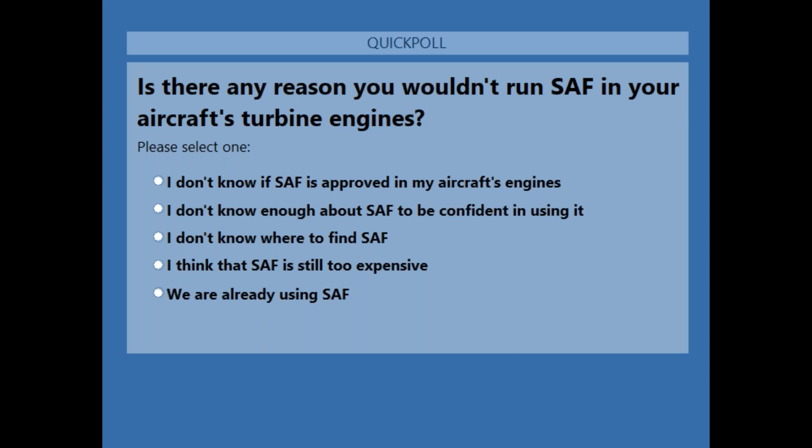The two top results were: I don't know if SAF is approved in my aircraft's engines, and I don't know where to find SAF. Those two will be answered today, hopefully in this seminar.

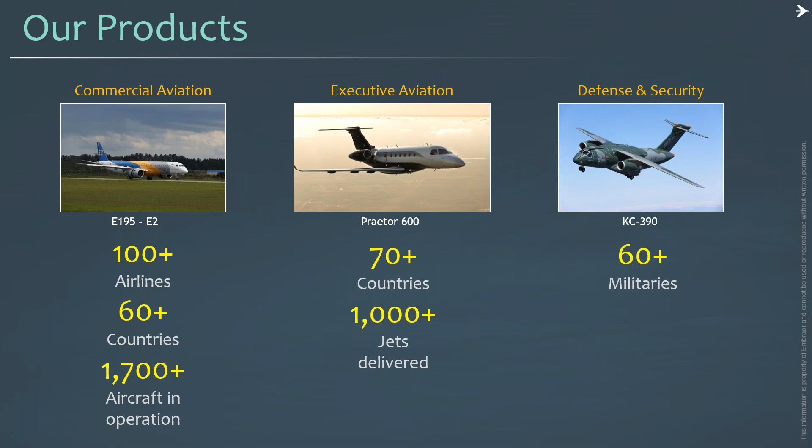Well, aviation climate actions. Let's set the scene for sustainable aviation fuels, or SAFs. The aviation industry has an ambitious target for emission reduction: reducing 50% of net CO2 emissions by 2050, compared with 2005 levels. The industry has made significant progress, avoiding over 10 billion tons of CO2 since 1990.

Let me talk about some examples. In operations, air traffic management modernization is very important for shortening routes, improving the efficiency of the system, and reducing delays. We are reducing fuel consumption and reducing CO2 emissions.

In terms of infrastructure, airports are using alternative energy for ground equipment, such as biofuels or electric cars.

Global market-based measures: the main example here is the ICAO CORSIA. ICAO is the International Civil Aviation Organization, and CORSIA is a reduction scheme for CO2. Airlines will start offsetting the growth of CO2 in international flights between voluntary states.

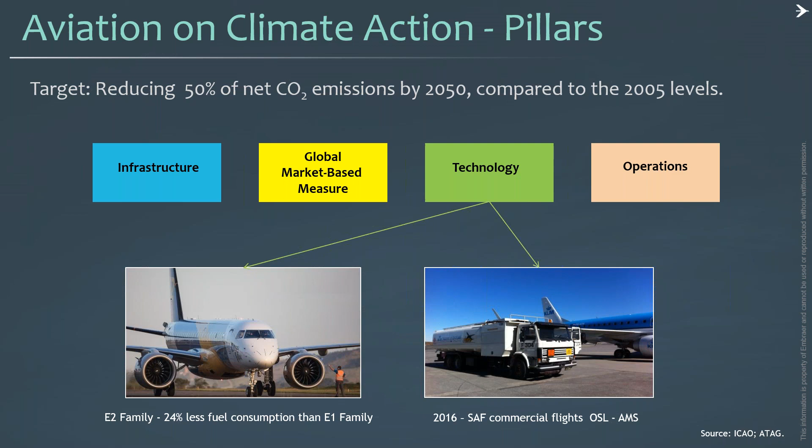But first of all, let's understand conventional fuel. Next slide, please. Conventional fuel versus sustainable aviation fuels—we need to understand this difference.

Conventional jet fuel, or aviation turbine fuel as it's technically called in some standards, is fuel derived from conventional sources. According to ASTM International, these conventional sources are crude oil, the largest source used, natural gas, liquid condensates, heavy oil, shale oil—mainly in the United States—and oil sands.

Alternative aviation fuel is a synthetic fuel, produced from non-conventional sources. I usually classify these non-conventional sources into renewable and non-renewable sources. The most famous non-renewable sources are coal, the oldest used, and natural gas.

Among renewable sources, there are many, but here I'm listing some: vegetable oils, used cooking oils, wood residues—sometimes called lignocellulosic materials—municipal solid waste, industrial waste gases, and more recently, microalgae oils. It's important to say that alternative fuels certified for both quality and sustainability will be designated as sustainable aviation fuel.

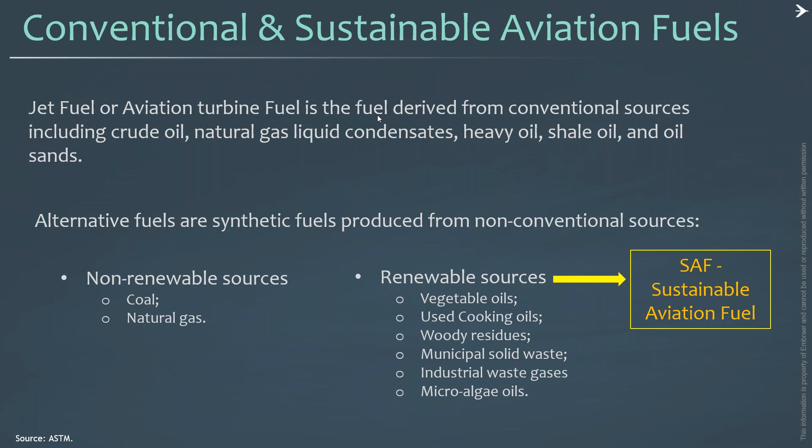But before sustainability, let's understand an important concept in aviation: drop-in fuel. Next slide, please.

Ensuring safety and performance—safety is the first concern in aviation, performance is the second. Sustainable aviation fuels must be drop-in.

A technology candidate seeking approval as an alternative aviation fuel must be drop-in, and needs to deliver the same level of safety and performance compared to conventional jet fuel, which is the fossil jet fuel that has been used for decades in aviation turbines.

And why do we need this drop-in fuel? Because there are something like 24,000 aircraft in operation around the globe. There is no chance for ongoing modifications to engines, aircraft fuel systems, or even fuel supply infrastructure. There's no space for change.

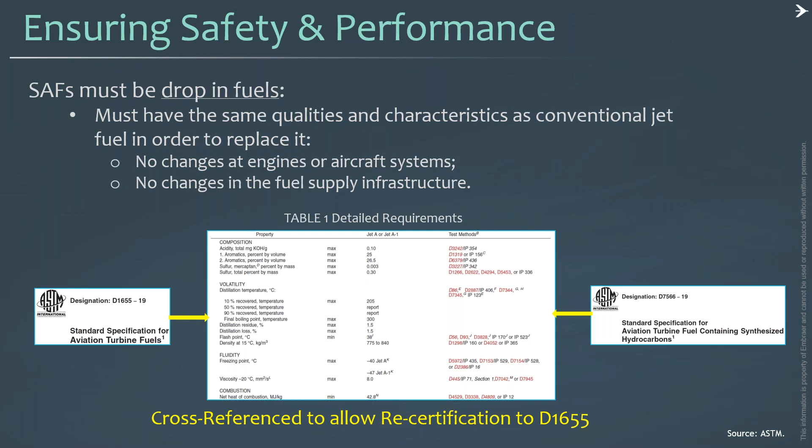But how can we approve a new technology as an alternative fuel? In the next slide, we can see the process.

This leads to Tier 2. Tier 2 is a step with many tests to be done. For example, you need to provide information related to property behavior, such as density versus temperature and viscosity versus temperature. Another important step at Tier 2 is material compatibility - tests for metallic and non-metallic parts need to be performed. It's a very important step at this tier.

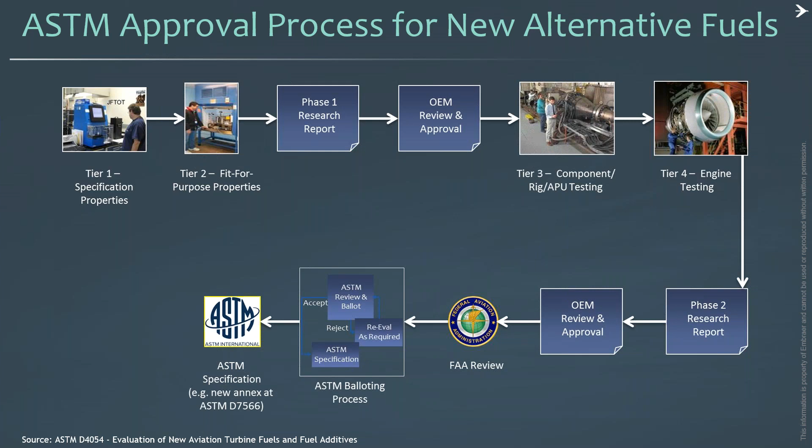Mainly due to the level of aromatics - aromatics is a chemical component that's very important. There is a minimum level of aromatics required in sustainable aviation fuel composition, and this minimum is necessary for different systems, meaning for the fuel system and to allow the performance of some elastomers.

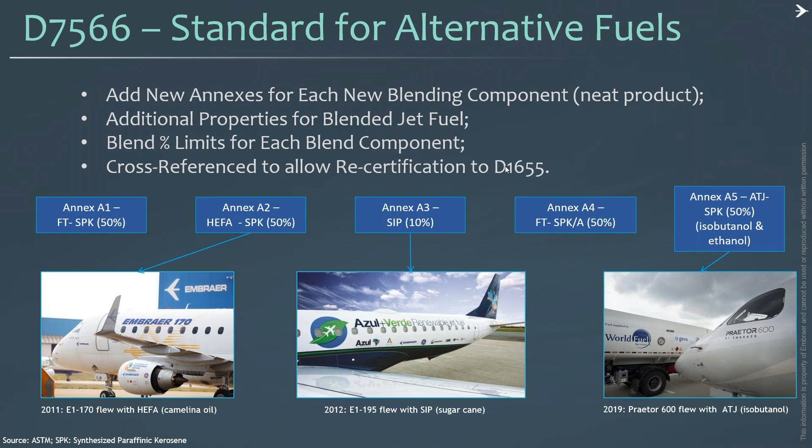You can think, oh, it's just these flights every day around the world, it's a small number. Okay, it's a small number, but have in mind that SAF is a new chain. It's under development. Mainly compared with other biofuel industries, you have a small number of plants producing SAF around the globe. But in our opinion, there is no chance for return.

SAF is very important because aviation is liquid dependent. Electrification, mainly for commercial aircraft, is still far off. The aviation industry is aware of its responsibility with the environment and truly committed to reducing global emissions. For this reason, we rely on sustainable alternative fuels as part of the solution. There is no way to return. We need to have sustainable alternative fuels for this huge amount of aircraft that will be flying for many, many years. Thank you very much, and I'm very proud to be part of this webinar.

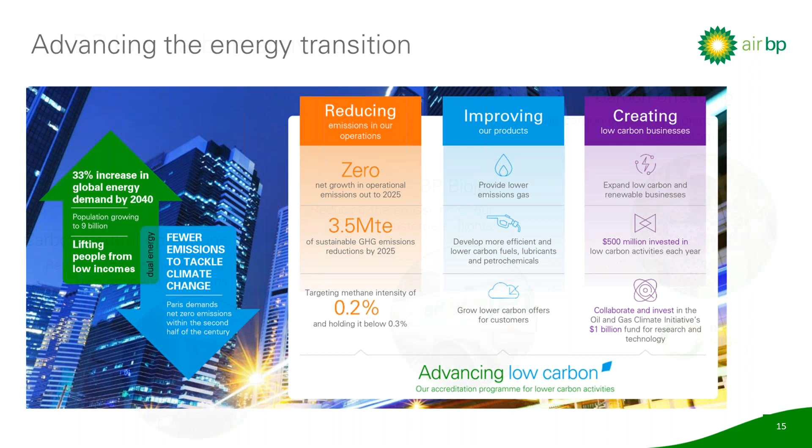I'll go on to the next slide, if I may, and I'll talk a little bit more about what Air BP is doing, because this is a microcosm of the bigger picture. So Air BP is the aviation fuel marketing business of BP, and we've been active.

We're more than 90 years old now, but specifically around low carbon, we were involved in some of the very early test flights here in 2008, 2010, 11, but we really got started in 2015, 16 with a number of activities across the low carbon space. That started with us being the first fuel supplier to be certified as a carbon neutral operator.

At all of the sites globally where we operate, we have a 10-year carbon reduction plan, and under the PAS 2060 program are certified carbon neutral. So we've identified what the carbon footprint is, put in place a plan to reduce our footprint over time, and then any residual emissions we carbon offset in order to create a net neutral position. So that's us looking after our own footprint.

And then we look at what we can do to help our customers with their own carbon challenges, with their own response to the emissions of their operations. So we make available sustainable aviation fuel to our customers under our BP Biojet brand. And I'll tell you a little bit more about what we're doing there specifically later.

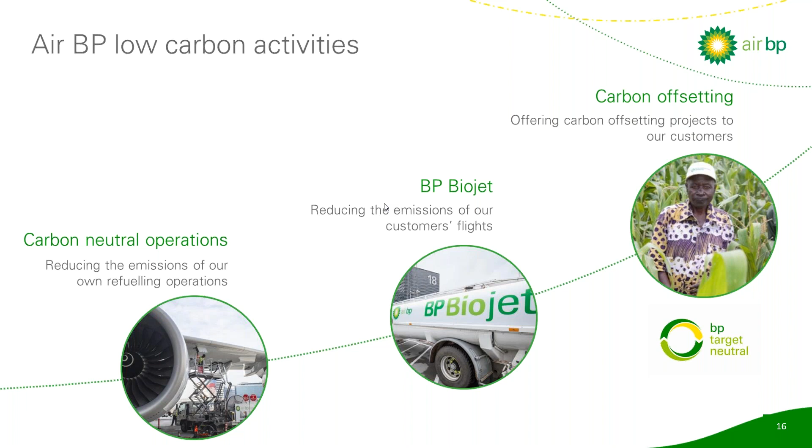We also work with another part of BP called BP Target Neutral, which is a not-for-profit part of BP that invests in carbon offsetting projects all over the world, creating both very high quality voluntary carbon offsets, but also local socioeconomic benefits. We make those available to our customers, as well as obviously using those for our own operations to make them carbon neutral. Great, next slide please.

At this point, I want to pause and just try and tackle the question of why are we interested in sustainable aviation fuel, building on some of Marcello's comments, and then why is sustainable aviation fuel of interest when we're reducing our carbon footprint.

It's clear in aviation that we are not going to be able to make a material move into electric aviation for several decades to come, and probably longer when we think about wide body long haul operations. Therefore, we're going to need to work with the infrastructure that we have, and therefore we need to reduce the carbon footprint of the fuels that we use.

The biggest contributor to the carbon footprint of the fuels is what they are produced from. If you're using carbon that has been extracted from the ground, then you're adding to the overall amount of carbon in the atmosphere. So instead, what we want to try and do is reuse the carbon that's already in the atmosphere.

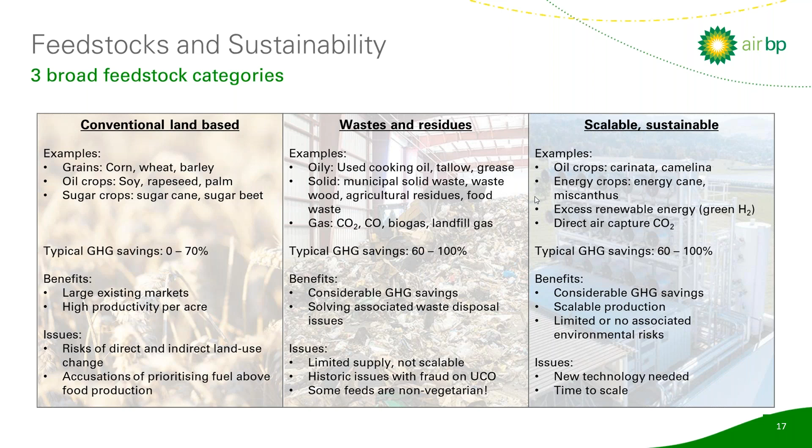Marcello's already talked about a lot of these, so all I'm going to focus on is a quick recap and mentioning who the leaders are in terms of technologies in this space, because that sets the scene for some further comments to come.

The HEFA process is the production route that's the only one currently producing commercial volumes of SAF, and those are produced by Neste and by a company called World Energy in California. The World Energy plant uses the UOP technology, while Neste have their own technology.

Alcohol to jet is increasingly coming into play. Gevo are in the process of scaling up towards commercialization, working with butanol derived from corn, and LanzaTech are working with waste industrial gases through an ethanol to jet fuel process.

I think the other key pathway to focus on is the Fischer-Tropsch FT SPK, working with municipal solid waste. There's a number of plants in development there. One company called Fulcrum, BP actually has a part ownership stake in. We invested in them back in 2016, and other projects are coming forward that will convert household waste into jet fuel via the Fischer-Tropsch process.

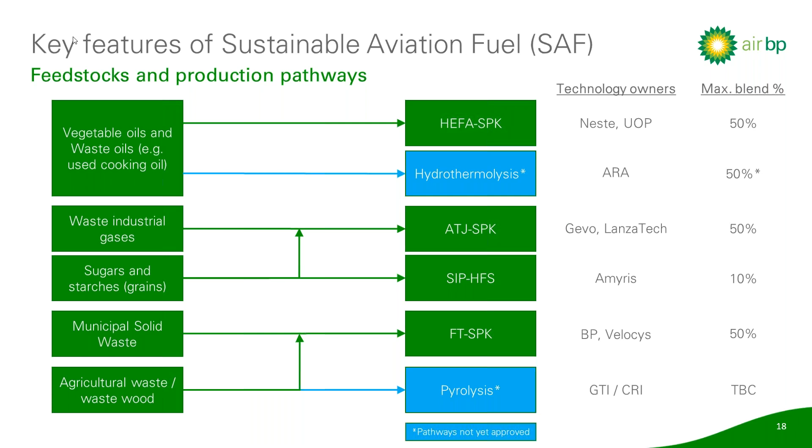It's worth re-emphasizing how the fuel we produce is absolutely chemically indistinguishable from the regular jet fuel component. It goes through a recertification process once blended, and from that point forward the fuel can be used through all existing infrastructure. There's no modification needed for any of those systems, or most importantly, to the people on the line, or to any aircraft in operation today. Any aircraft certified to the latest fuel specification standards, whether ASTM D1655 or Defence Standard 91-091, this fuel is suitable for use in those engines.

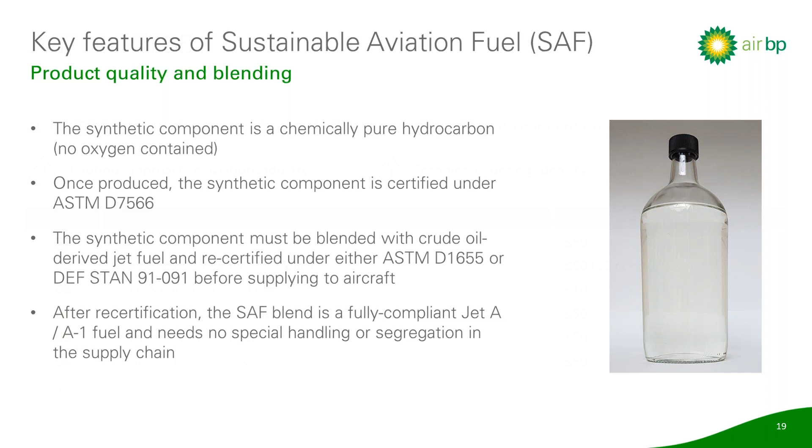I'll put this slide in mostly for you to refer back to when the slides are shared, touching on some of the things actually constraining the blend level here. It's really around density and viscosity. Otherwise we'd be able to blend at a higher level. From a quality perspective, this is very high quality, pure hydrocarbon fuel, and it's just a question of managing the properties needed in the engines the way they work today.

I know there are OEMs today working on moving to even higher blend levels, ensuring the equipment they're producing can handle higher blends, whether 80% or even 100%. There are some test flights going on at 100% with HEFA to show that's possible. Okay, next slide.

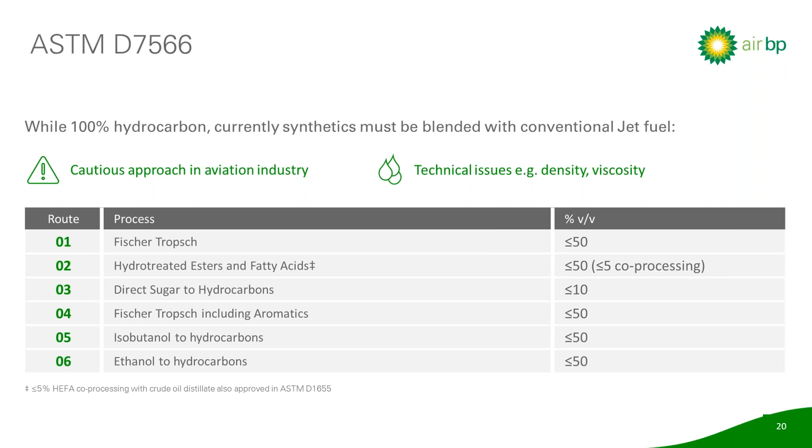One other side benefit we can derive from sustainable aviation fuels, because of their very high quality, is that there's no sulfur contained in the fuel, because that's not so prevalent in their feedstocks as sulfur is in crude oil. That can have an air quality benefit, and because of the lower aromatic content, we can see an improvement in air quality from reduced particulate emissions as well. So there's these sort of side benefits we can also achieve.

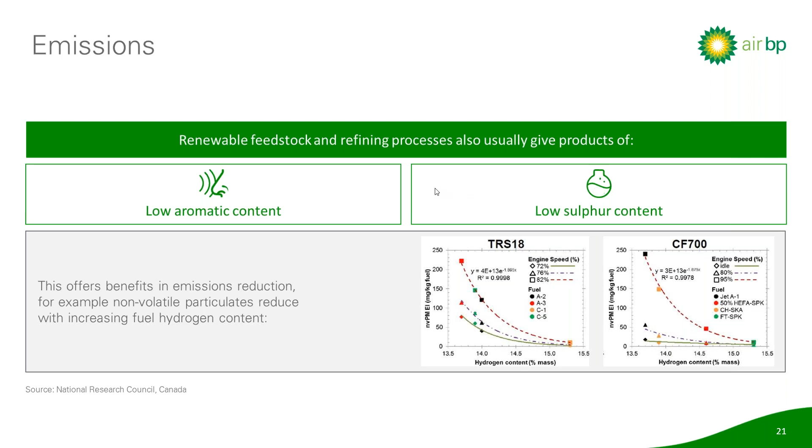Research is still ongoing into those, and there's been a NASA study suggesting there can be quite a significant improvement, or reduction in some of the negative impacts you see at altitude in terms of contrails and so forth. That research is still ongoing, and I think we'll learn more over the next few years. Okay, next slide.

Another thing to mention from the technical perspective, as more work comes through, is that we now have the ability to use existing conventional refinery equipment to produce sustainable aviation fuel by co-processing. We can feed up to 5% of vegetable oils or waste oils into a refinery unit, and therefore produce jet fuel with up to 5% sustainable aviation fuel already incorporated. That's now permitted under the main jet fuel specification. That can have advantages in that there's not so much investment required, and it can be a very cost-effective way of producing. So that could hopefully help unlock a bit more supply going forward.

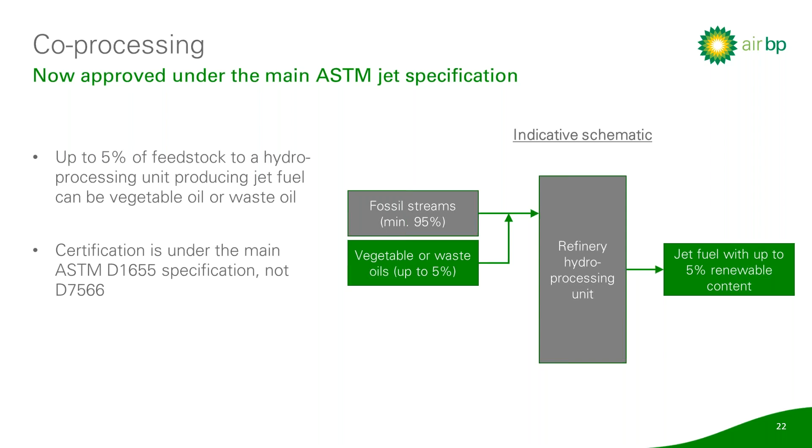In the UK, for example, the risks to the environment around private jet use have been front page news, with Prince Harry being called out by a number of tabloid newspapers for flying his family around by private jet, despite carbon offsetting and trying to do that in a responsible way. So this is becoming more of a mainstream issue, and we're going to see that public interest in how we're managing the emissions of our industry and trying to find more sustainable solutions becoming an increasingly important topic.

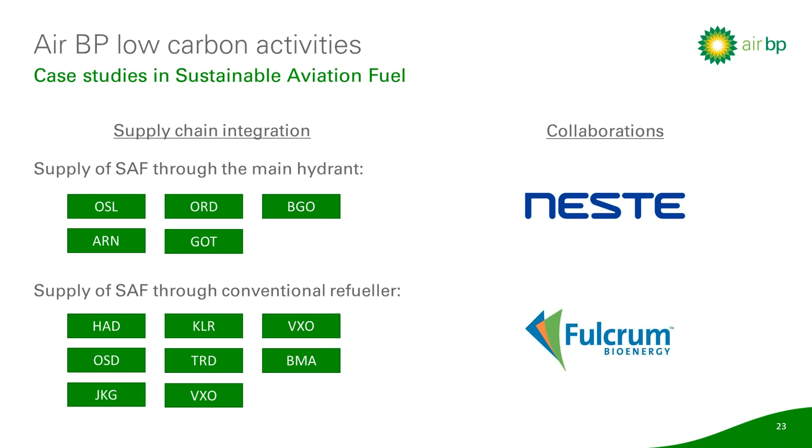Okay, conscious of time, I'll jump to the last slide. I just want to sum up where we are and what the challenges are to enable us to grow this industry as quickly as we can. We've heard how important it is that we find solutions here, because we can't rely on electrification, unlike road transport can, to really get a lot of renewable energy into the system.

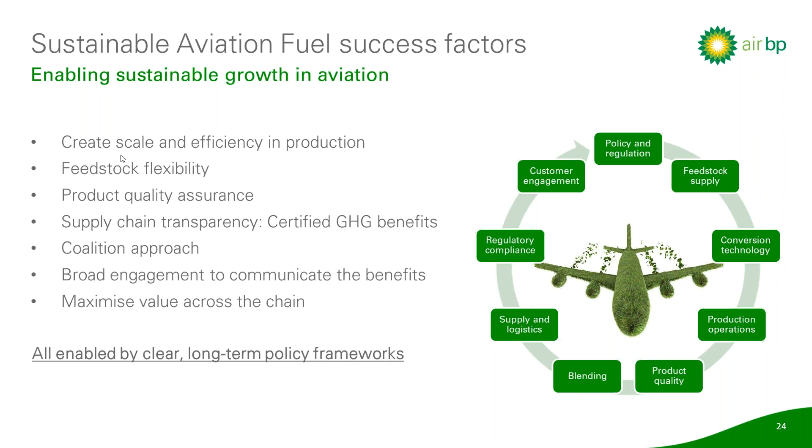So we'll start off with, has any study been done as to whether the emissions are in fact better for the environment? That's a question, Tom, from Mark.

Great, thanks, Mark. As I alluded to, there's a number of studies that have been done, but I think there's still more work to do. In terms of the way that the fuel burns itself directly, it's very slightly more efficient actually to burn sustainable aviation fuel than it is regular jet fuel. There's maybe a 1 to perhaps 2% improvement in pure combustion efficiency. But in addition, there are these other associated benefits from its higher purity, with lower aromatics and less sulfur creating sulfur dioxide, you can end up with a better outcome from an air quality perspective as well. There's a NASA study that is looking at the effects of that at high altitude, and a number of other things there. And there was a reference under one of my slides to a Canadian study as well.